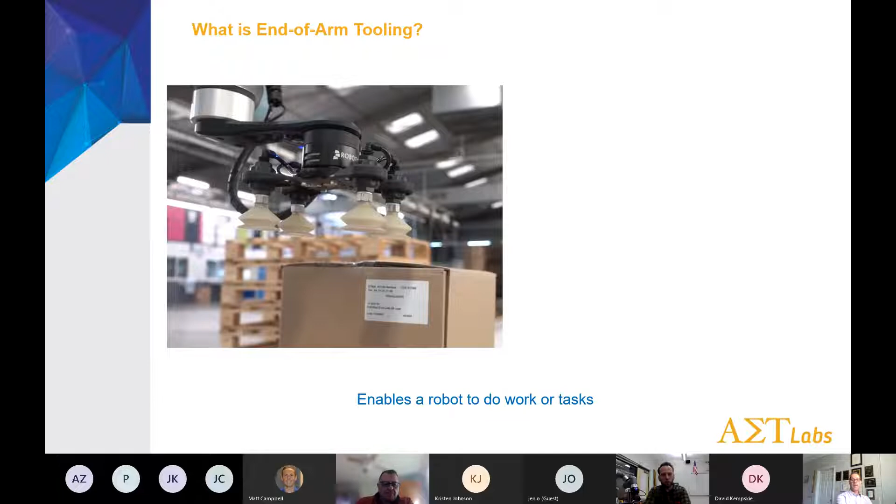But what is end of arm tooling? It's what enables a robot to do work or tasks. In this case, we're going to pick up this box and move it, using vacuum pads to make contact with the box. It could also have some kind of end of arm tooling that does a task - this is kind of a crazy multi-tool end of arm effector.

So it can really be anything, any kind of creative design. With Universal Robots, I look at this one with these multi-tools on it - this is what collaborative robots have enabled, for people to become more creative and think of these wacky ideas of what to do with the robots. You would never see anything like this on an industrial robot, just because of their nature - they need to be behind cages, and they're not as able to switch between applications as easily.

So, end of arm tooling - what makes it up? They're all different, but in general you're going to have some kind of transition plate between the end of arm tooling and the robot itself. It's got to fit the design right at that wrist, so it's going to generally be something strong - could be made out of aluminum, could be 3D printed as well.

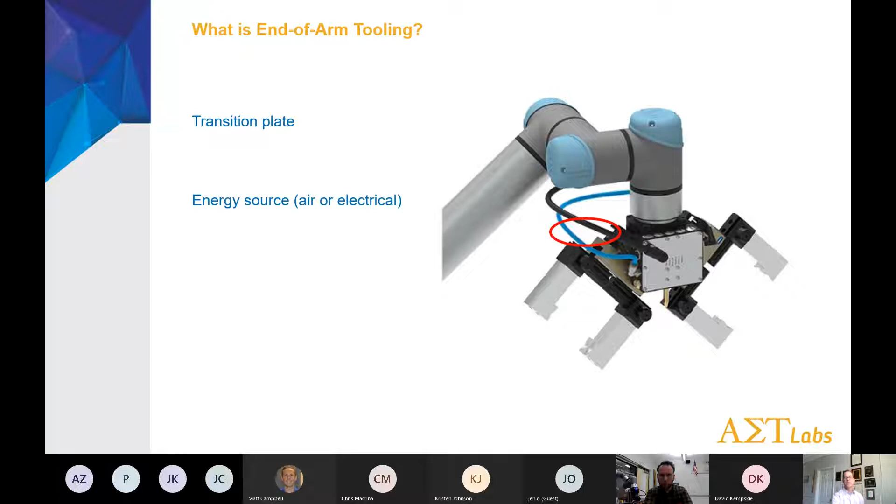You're going to have some kind of energy source, either electrical or air. Sometimes this is channeled through the arm of the robot, sometimes there's a valve right within the robot too, which is nice for keeping things clean. There's a sensor - something that needs to detect if it's picking something up, and it needs to know when to tell the robot to move.

And of course, the tooling - and this could be, again, anything. Most commonly you're going to see grippers and vacuum pads, but as you start to research it a bit more, there's no end to the types of tooling that can be out there.

Some considerations when designing end of arm tooling or coming up with an application: the application itself, of course, and what's the cost, what's the development time. These can certainly need to be a lot more - there needs to be something that, if it's placing the item into a fixture or something, may need to hold it, so you need to design that. There's a lot that can go into it.

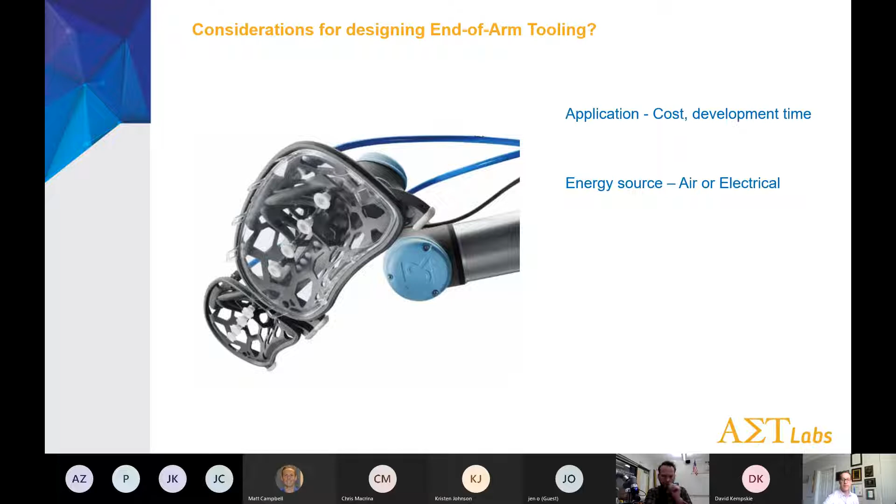The energy source - do you have the air supply? If it's not convenient, you need to provide some kind of electrical source, which is great for what we're talking about today, because Robotiq has these really nice end effectors that do not require an air source, but they are more expensive for sure. And the sensor, again, go/no-go, whatever it might be.

Safety - what are you going to have on the end of this robot flinging around? Is it going to be something sharp? Even with collaborative robots, they will stop when they sense something with the force sensors, but if there's something sharp on there, that could still hurt you. So it makes a difference - keep that in mind.

Weight, and this is a big one. With weight, you're really going to either increase the cost because you need a larger robot to pick up that end effector, so you want to look at ways to reduce the weight. One way is 3D printing, which has become a standard for a lot of manufacturing engineers - mainly because you can design them faster, make those fixtures lighter so you don't need as large a robot, and everything costs less since you're not machining them.

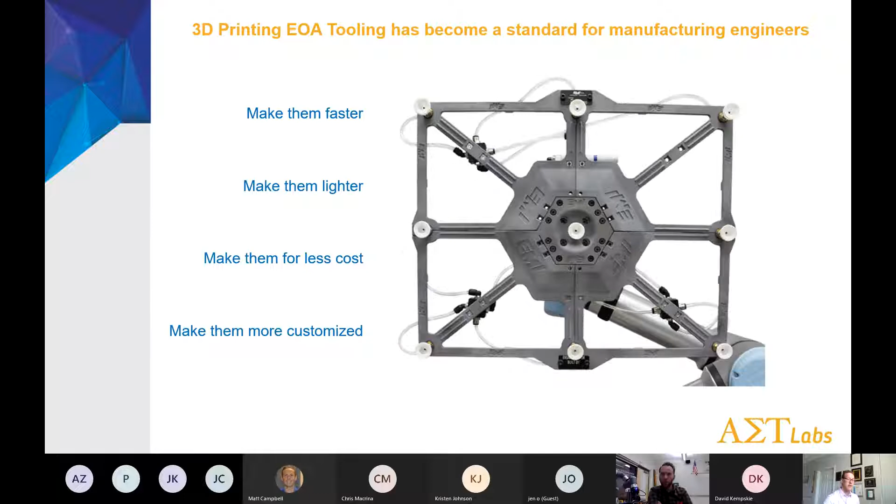The costs involved are much lower, and you can do a lot more in terms of customization. You can funnel channels through the tool itself to allow for air. In this case, they're using tubes, but you could do that in some cases. So there's a lot of things you can do with it when it's 3D printing. If you're doing anything with 3D printing and you're going to meld both robotics and 3D printing, it's a great combination.

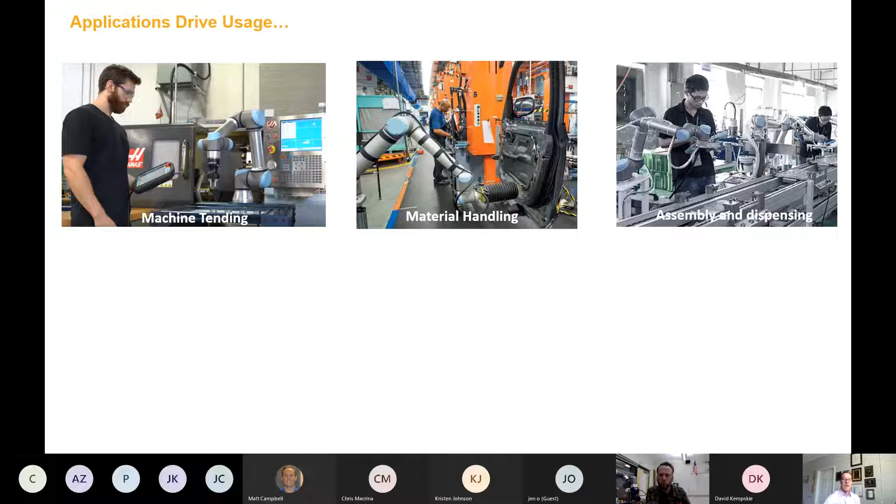We can't talk about end-of-arm tooling without talking about applications. Applications drive usage of the robots. Here are some standard industrial applications: machine tending, basic material handling—they're moving a door in this case—assembly and dispensing, welding, packaging, palletizing, metrology, and inspection. They all have their own specific uses and specific end-of-arm tools for that.

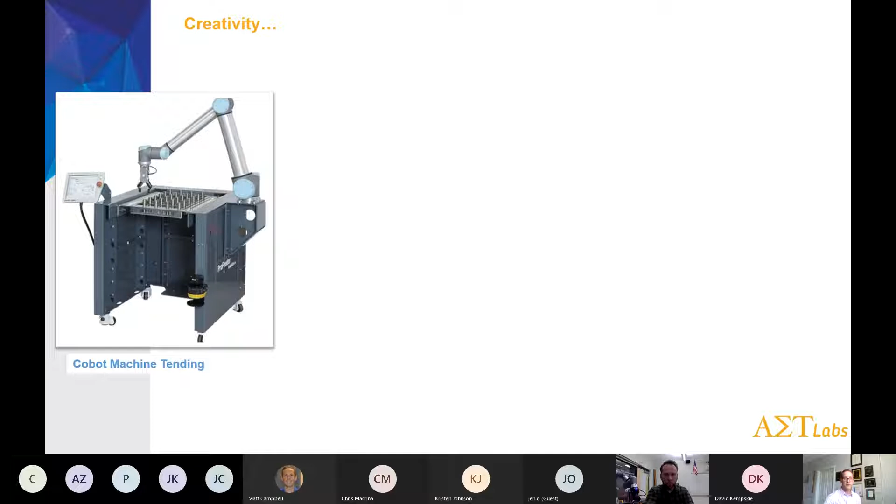With applications driving usage, especially with cobots, they drive creativity as well. We've seen that through a number of different companies that work with Universal Robots, and just the way people use the robots, because they are not bound by a cage and can collaborate right next to another person. The designs are so much more creative.

What we're looking at here are solutions that can be used in an educational space or in an industrial space. The one on the left is what we would integrate for a machine tending application. This will roll right up to a Haas mini mill, and with a little bit of integration work, we have a kit that we would use to integrate that in.

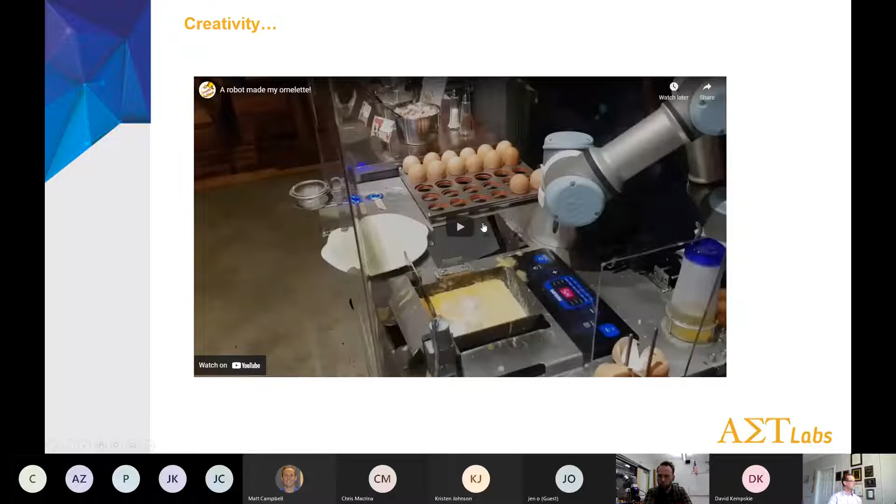Further creativity: food prep, bartending. These are all applications that have happened out there, and they all require unique end-of-arm tooling. This is just one of my favorites, so we'll watch this video real quick.

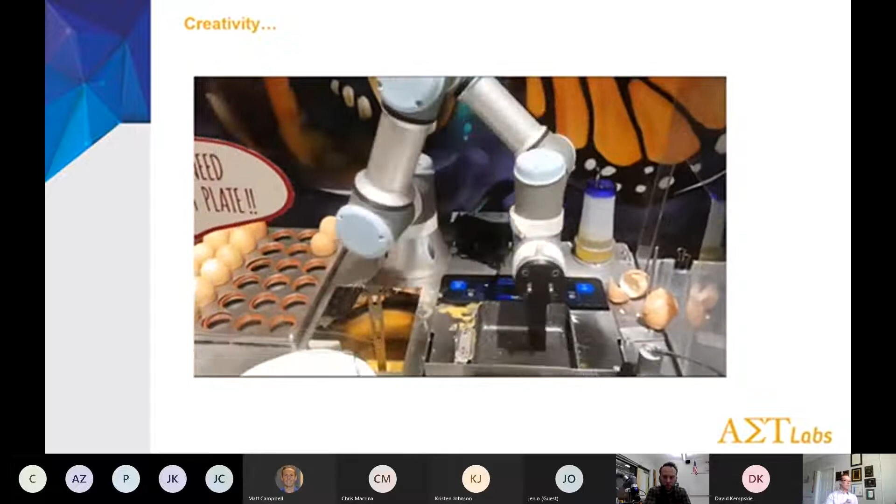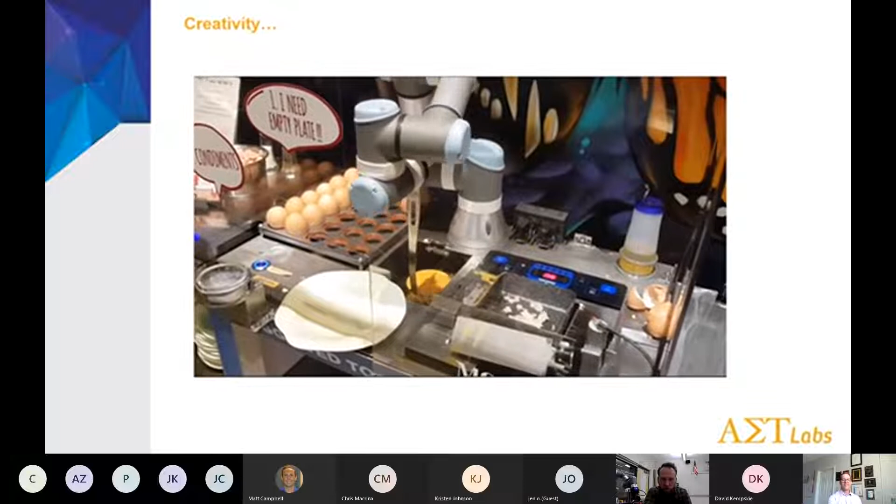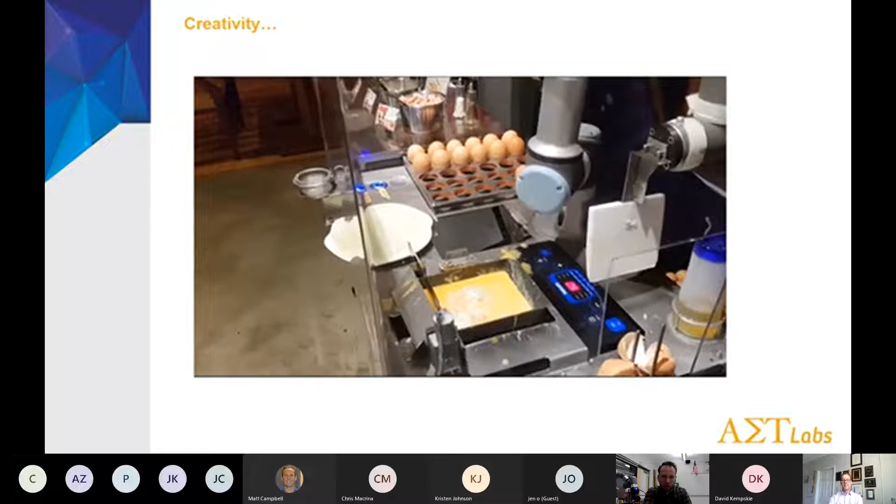That gripper is very small, huh? The fingers on it. It's just meant to latch. Yeah, I'm noticing things I haven't noticed in this video before, like what it just did there, where the fingers just opened up to hold it.

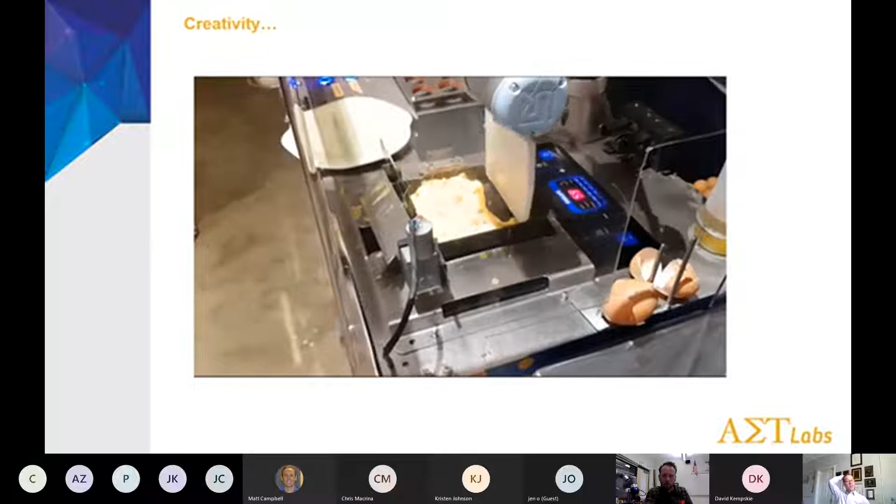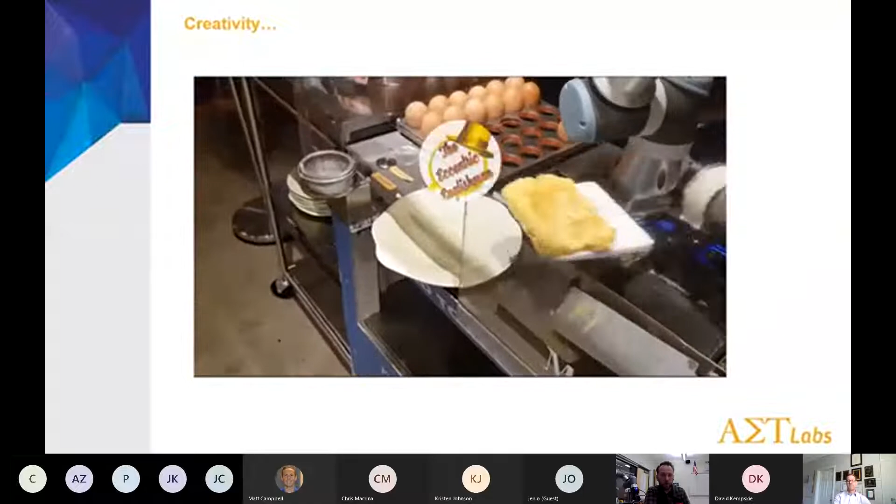So it's like what they would consider an auto tool changer, and highly customized. Yeah, and a multi-purpose gripper too. And there is, on the UR Plus site, a gripper that does that, and maybe even Robotiq has something like that. Well, actually, Dave, you got me thinking that the gripper we're showing today—there's nothing that says you couldn't just take the fingers off this gripper and switch them out and even customize them if you wanted to. For sure, yeah, for sure. I just think that omelet's maybe a little undercooked, but nonetheless, really cool how that's done.

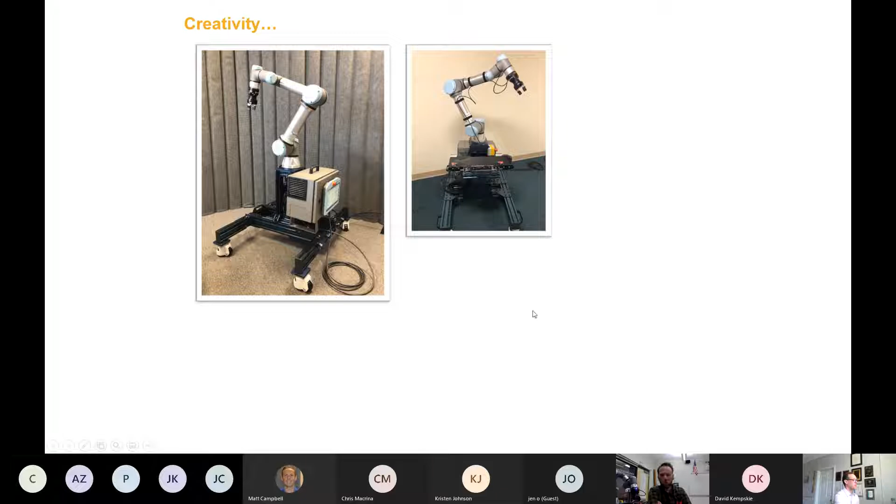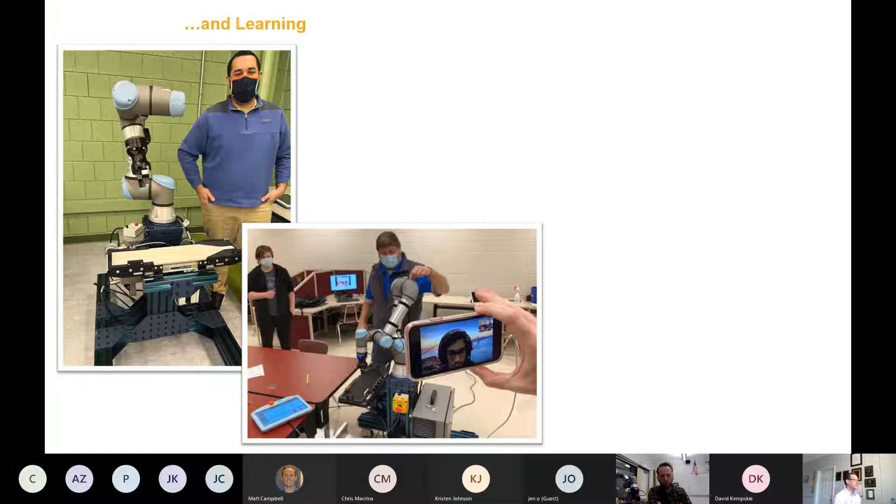What's really nice about these cobots is you can just roll these things right up to a table and work right next to something else. Again, no cages needed, and we can be really creative in how we go about designing these things, and really it comes down to learning, so that the usage applications drive the creativity and learning. It's exciting stuff when students realize what they can do with these, and I'm just so excited to see what Essex Tech does as they get an opportunity to really start using their robots even more.

A couple final last things about the robots, and for a lot of us here on this call, this is kind of where you guys are the center of the universe when it comes to the robots and implementing them in your program. These are some of the things I'd see you doing with the robot in your program. You might be determining a return on investment for a project, designing end of arm tooling, jigs and fixtures for special projects, material handling.

With collaborative robots, the thing you're not going to have like with industrial robots is the frequency of deployment. When you make an investment in a universal robot, you don't have to dedicate that robot to one specific task. The cost of putting an industrial robot in with guarding and everything else means it's really going to stay with the same application it was designed for originally. With universal robots and collaborative robots in general, you don't have to do that because you can easily redeploy it. That's a big part, I think, of what I see here.

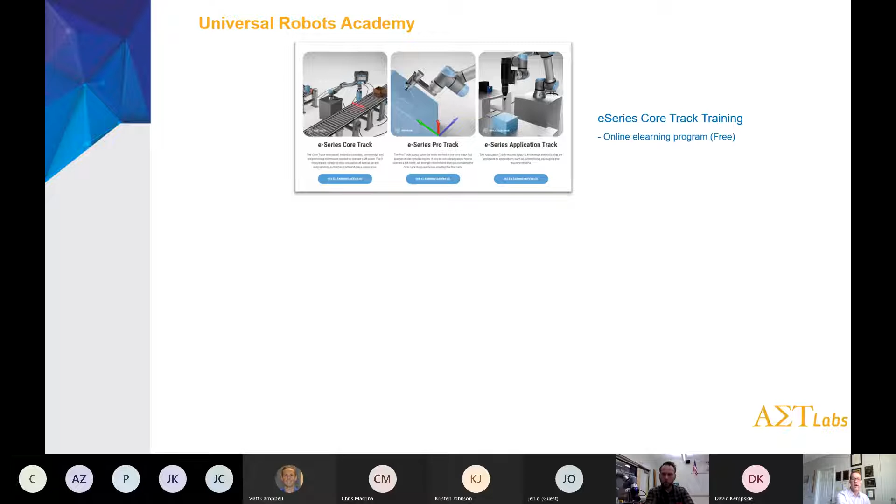Or, to take your program to the next level, there's the skills certification program with Universal Robot. It's a hardware package, kind of like some of the ones you saw in those previous pictures. It's a certified instructor training program with a curriculum that's 10 units, 32 hours. It is accredited as well, and we can certainly provide you more information on that. But that's my overview.

I'm going to hand it back to Adam, unless anyone else has any questions.

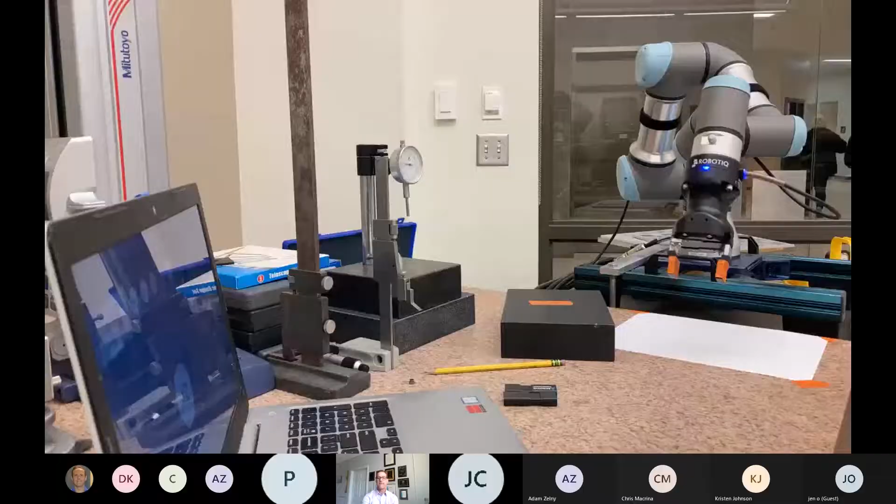All right, so I am going to switch over my video to my phone. Okay, and if anyone can't see my screen right now, or you don't have the robot on your screen, you can let us know. It should be up there for you.

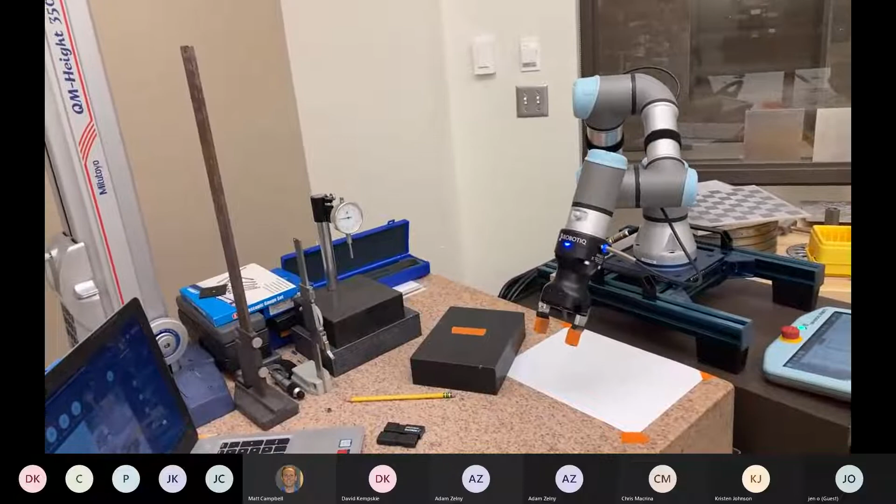As Dave mentioned, yeah, we are at Essex North Shore Technical - what's the full name of the school? Essex North Shore Technical and Agricultural High School, I think, is the full term. And it's a really, really neat school, I love visiting this place. But right now I am in the metrology lab, and students were coming in and out using this profile projector earlier. It was pretty cool, but a nice little spot.

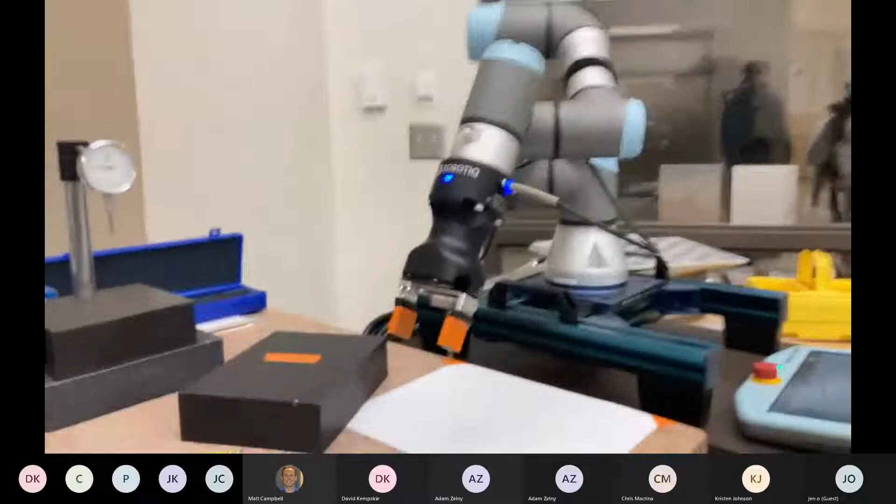All right, let's jump into the demo here. So I'm going to show you a program right off the bat, and I do want you to see - hold on, let me just do a quick adjustment here. I do want you to quickly see what the interface looks like on what's called the Teach pendant, and the software is called Polyscope. This is Universal Robots' proprietary programming software, and it's a really elegant user interface that I've really enjoyed using. So we're going to take a look at this program tree in a little more detail after we run the program.

Okay, so first thing we're going to do, I'm going to go ahead and start the program and just give you a little bit of an overview. And again, please, by all means, jump in if you have any specific questions.

So what we're looking at now is the wrist camera flashing its light and looking for an object. In this case, it did not find an object, so it's going to see if it can find one to bring back over for itself, but it did not. So it just stopped the program.

Now, if I throw down a USB stick and run the program again, this time it finds the object, picks it up, places it down, and comes back to look for another one. Didn't find one, so it goes back over to look for one, and this time it does find one.

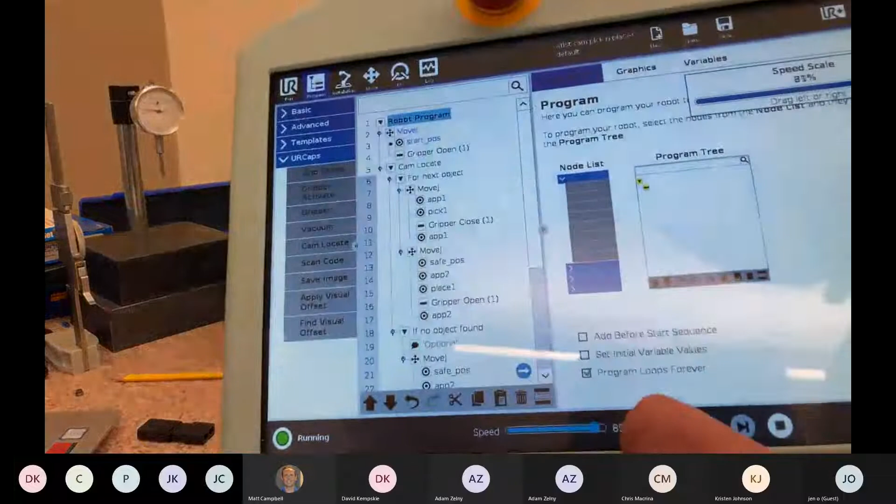I'm going to slow this down a little bit. And what's neat about this is I'm just on the fly slowing down the program speed with a slider right down here. So notice I deliberately angled the gripper when it drops because I wanted it to drop the USB stick in a random fashion, to showcase how the wrist camera is detecting the object within its field of vision.

And in this case, if we have a couple of objects, it will find both of them as denoted in my program. In this case, I said only to look for no more than 2 objects. And because it's going to pick up the other one, I'm going to want to remove this because it would just try to stack it on top.

And at this point, if I were in a classroom of students of any level, my next question would be, how would I alter this program to make it more efficient?

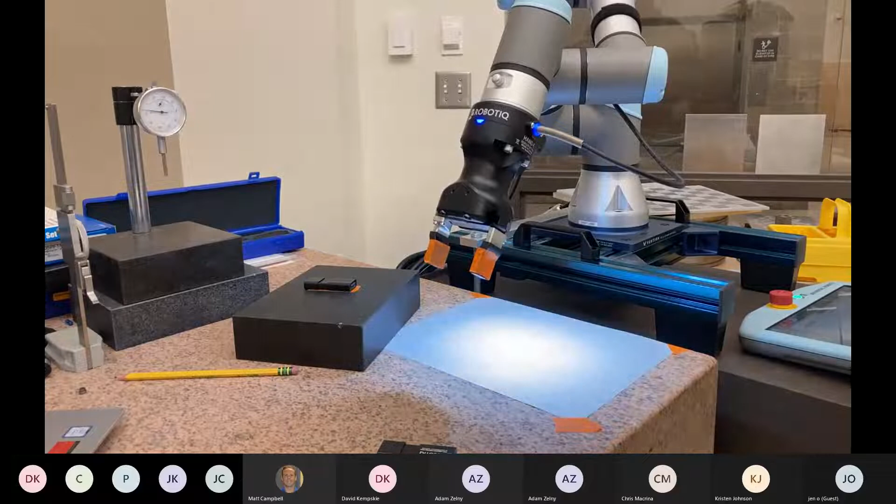All right, so this is a pretty standard loop here, nothing too flashy about the programming, but what I am going to do is change the dimension of the object that we're picking up.

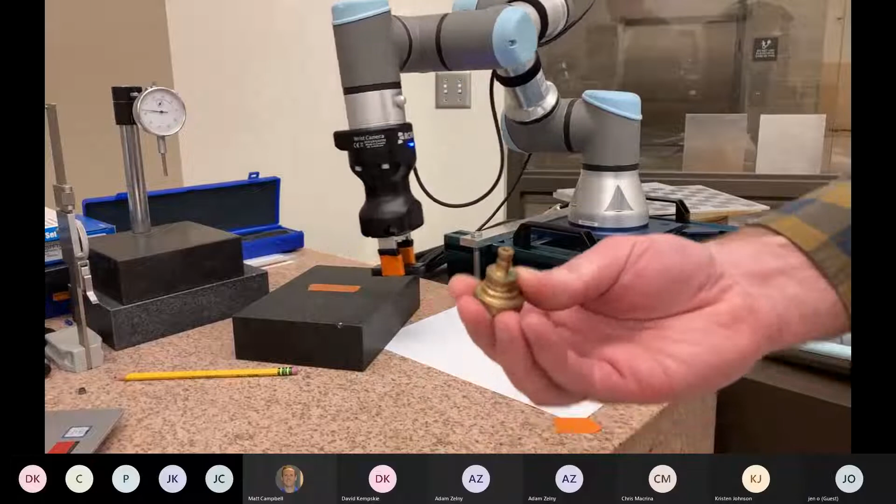I have a few, sorry, I'm just stepping away for a second here. Okay, so I'm going to try to swap out the object when it doesn't find an object. I'm going to try swapping it out for this little brass machine piece here, which has a different dimension than the USB, by probably 2 or 3 millimeters. So I'll let it run through its course here.

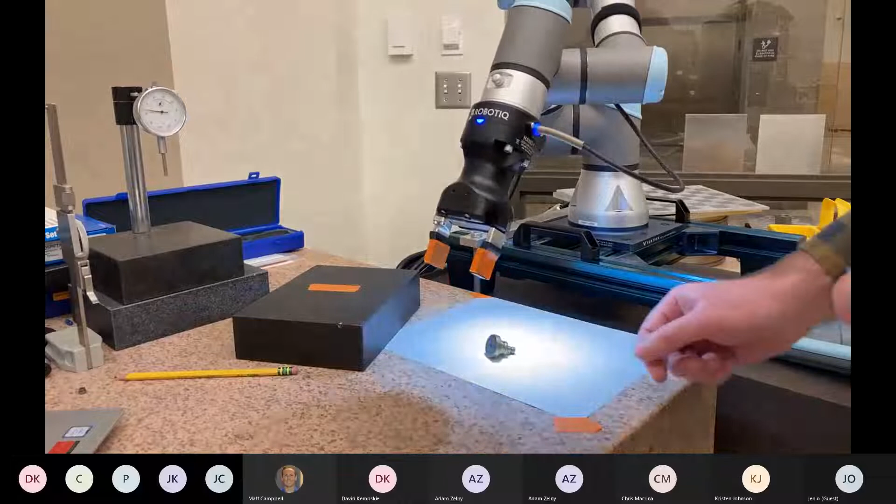And we'll see what happens when it tries to go pick this guy up. All right, so in this case, it did find an object there. It's going to go back to stopping.

So notice there, it found the object because the thickness was too close between the USB and the little brass component. But when it dropped it down and looked for it, it did not pick it up, right? So it definitely did a great job of distinguishing that this is not the USB stick shape.

But this time, let's try running the program again. And instead of the USB stick, I'm going to swap it out for a pencil.

Okay, so in this case, I programmed it to say, is it within a certain dimensional range? And if not, then open the gripper back up and let's stop the program because something's messed up here.

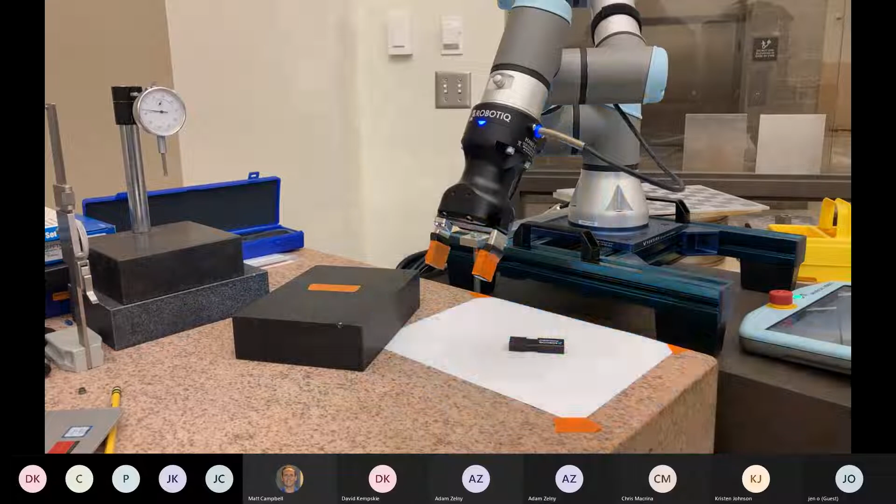Now, this is a great sample that we're looking at here. But when you're working in the classroom environment, in the lab environment, and let's say you're onboarding people to the robotics, the UR robot system and the Robotiq grippers and wrist cameras, how do you bring this to the next stage? Like, what is this for? And I think, what would be the application for this process?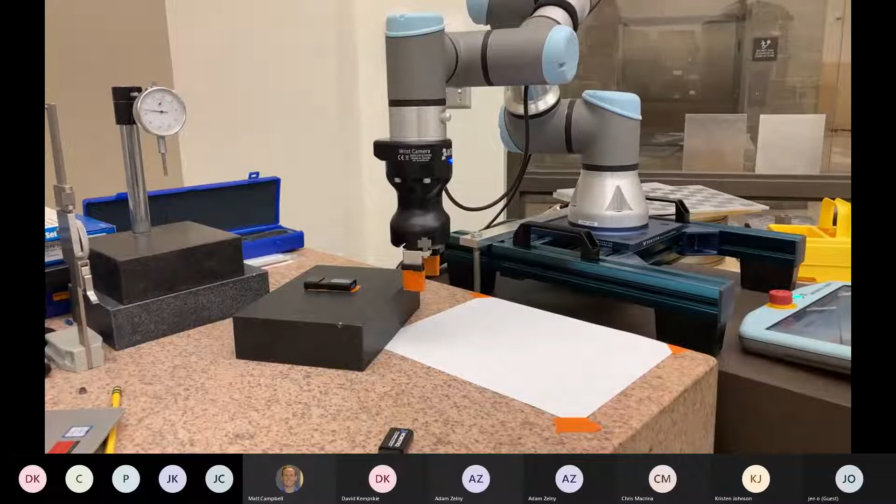And since Universal Robots is marketed exclusively as a collaborative robot where people are interacting with it on a regular basis, I'm going to stop the program. And I'm even going to come back just a little bit to see if we can adjust this. So really meant to come in and on the fly change waypoints, move the robot around, make small adjustments. But what's the end goal here?

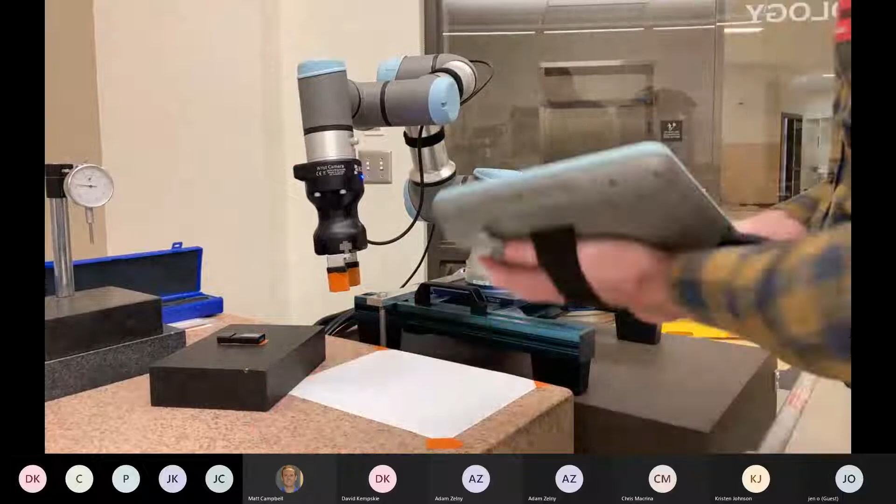In this case, if it was a collaborative robot and the point is I'm inspecting something, or I'm doing human inspection of this USB stick, and I am not really too concerned with manually palletizing these, maybe even on a plate, I can just more casually look at it and say, good, next, good, next, and have the vision system detect what I'm placing down. So I can kind of just quickly toss it over here. And that's just a small example.

All right, let's go take a look at the program tree.

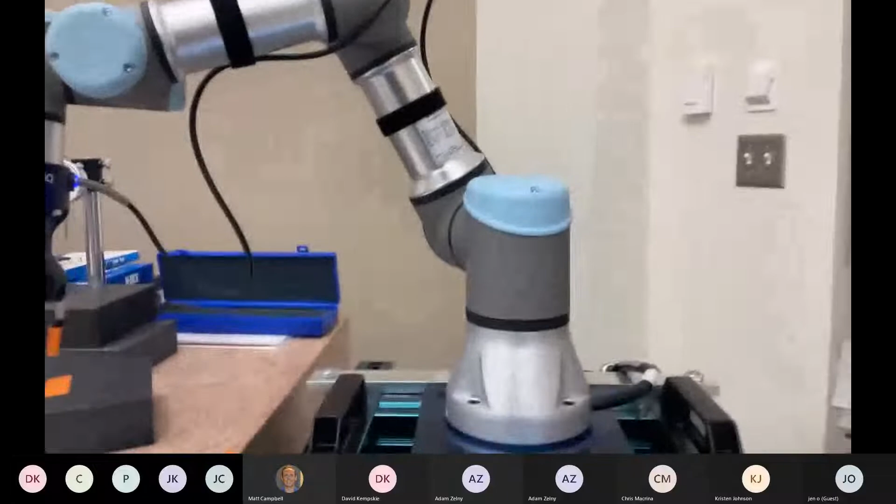Whether or not you're familiar with computer programming, Polyscope uses Python for its programming language, and it has a specific kind of buffer that changes the raw Python language to what you're seeing here. But you can write custom script in Python.

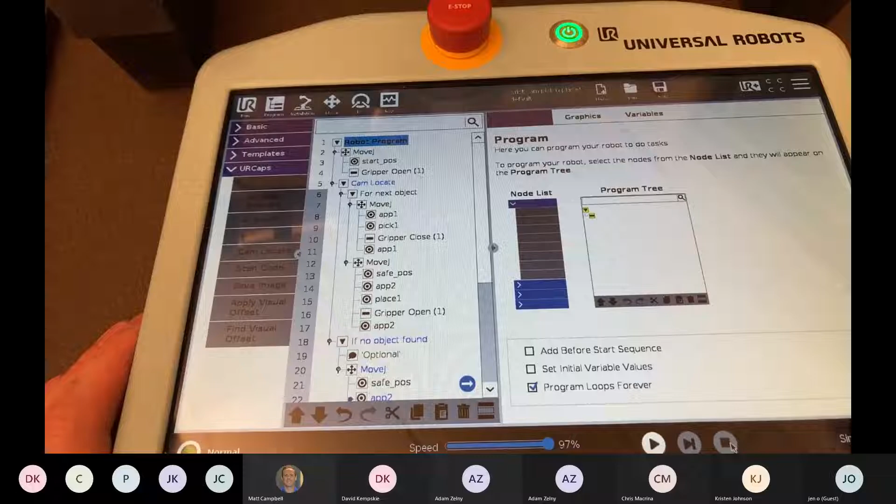Something Dave and I were talking about is our UR plus end effectors, or end of arm tooling, like this Robotiq gripper and wrist camera. They essentially come pre-packed with what's called a UR cap, which is kind of like an app that runs in Polyscope, and it comes pre-packed with all the custom script needed to run and operate the peripheral.

Let's take a closer look at what that looks like. In our program tree, some basics: we have a move command, which says let's do a start position and make sure the gripper's open. Then we have this really fantastic cam locate node, which is exclusive to the Robotiq wrist camera. I'd like to show you what programming this looks like.

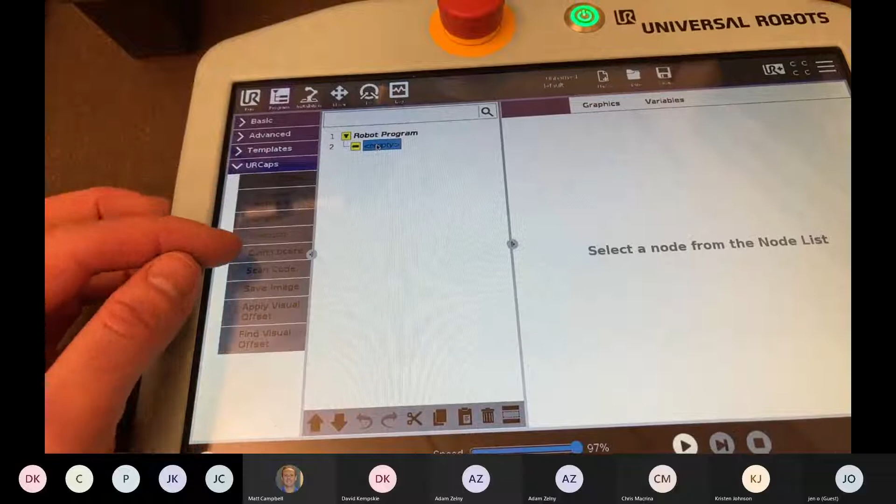So we'll go to a new program, and we are going to go into our UR caps section here. Click on cam locate, and right away it populates this. It just looks like a few items here, but beneath this is tons and tons of custom script written by Robotiq for UR.

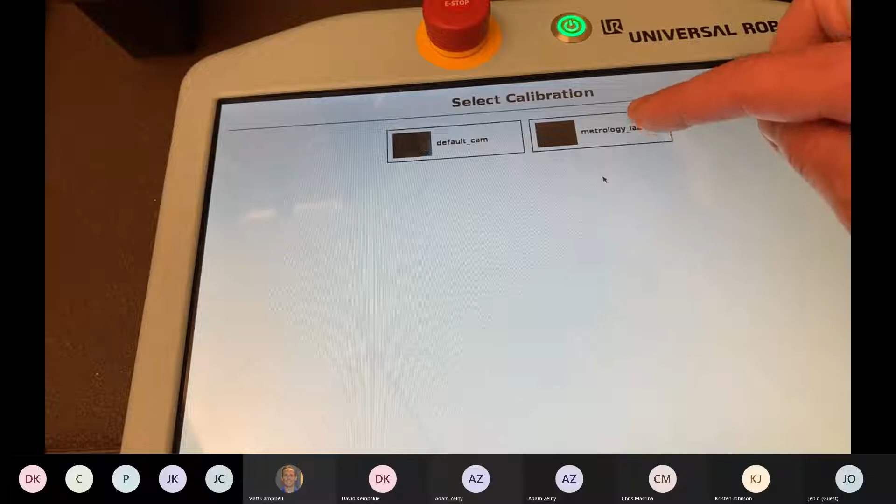So we'll click on teach object, and we're going to pick a calibration. In this case, earlier I made a calibration point for where we are now, the metrology lab. We'll see what happens when I click and hold.

Our go to snapshot position, that's what this is here. That's just going to move the robot arm to a position where the camera, where I set it, sees a good area of my picking point right over here.

The next thing I'm going to do is place an object down. In this case, I'm using the USB stick again. I chose this very specifically, a white piece of paper and a black USB stick, because with vision systems, that's a whole other area of technology you need to consider. We have this low reflection matte white paper, and a fairly low reflectivity USB stick, so they're both great candidates for the wrist camera to see the object.

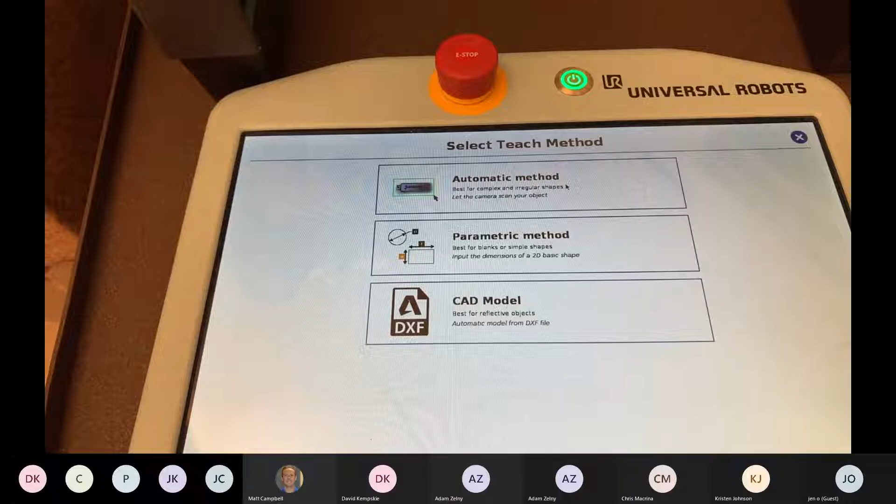Now the light comes on the wrist camera to look for our object, and we see a nice little display of the camera here. We have some reflection here, hopefully you can see this okay. Right away we see this green box around our object, which means it's done a good job of auto detecting it.

If I wanted to, I could go into some more advanced features of the camera, and this is stuff that you would see if you actually dug into a camera app on your smartphone, or were using a digital camera, exposure, focus, white balance, changing how bright your LED is, and so on. That would allow you to work in different lighting conditions.

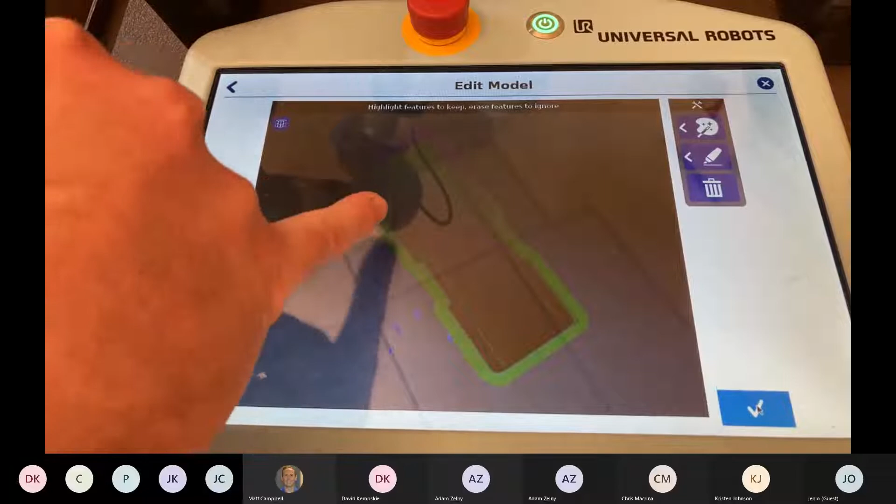So we'll say this is okay because it did find it. Here we have a close-up of what it exactly found, and it even shows us these little blue specks here. That actually is the data or the pixels that are essentially required to look for the object.

However, there's a bunch of stuff on the inside here that we don't need, we actually don't want to look for this. We just want to look for the outline of the object. So it makes it really easy for us to click on some tools and erase the blue sections, or the blue pixels, that we don't want to look for.

Can you just pick that up and kind of tilt it towards you just a little bit? I'm seeing a lot of reflection on the ceiling, I think. Sure, just want to make sure. Yeah, I don't know.

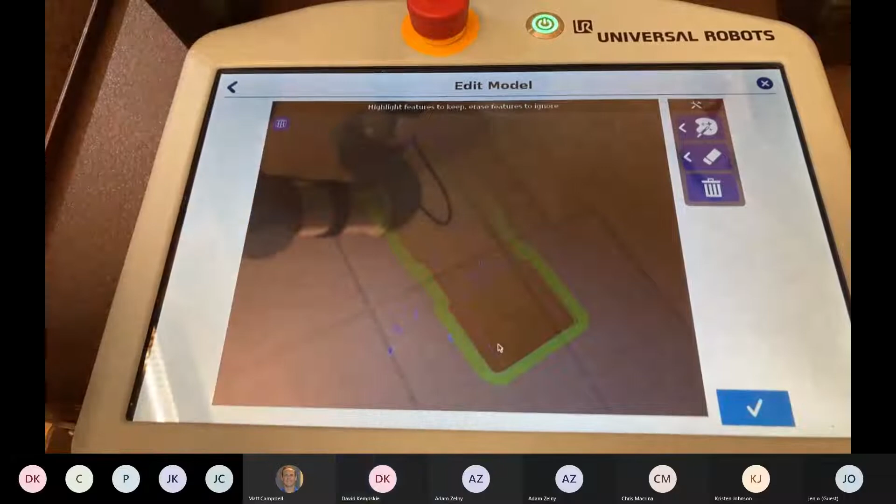I don't know if it's going to be better, honestly. Yeah, I know, it's tough. I wasn't sure. Okay, yeah, that's actually... I was trying to see what it was. Yeah, that's better right there. At least it gives people an idea to see it.

So I'm just basically erasing all this midsection here because I don't want it to look for this. If I flipped over the USB stick, it wouldn't have that on the other side, it would just be looking for the edge. All right, so once we're good there...

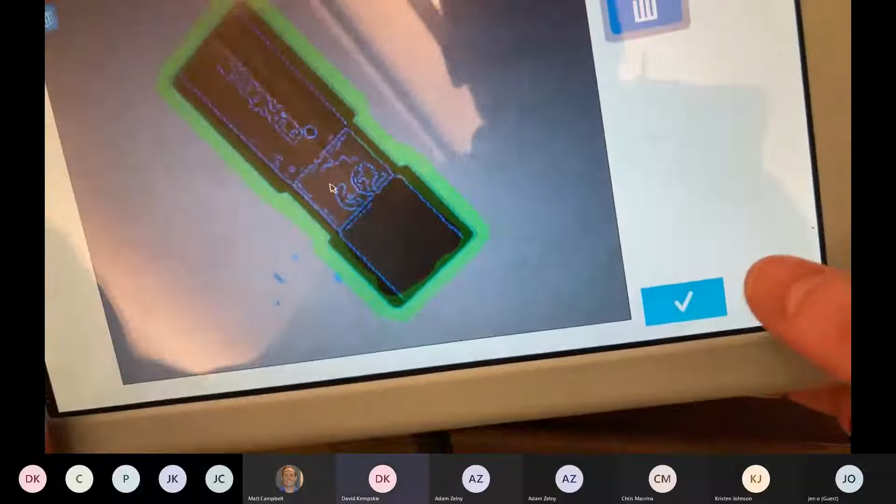There's a question from Patrick. I think he mentioned, can it find the printing? I'm not sure if he meant the print that was on that stick, and I guess the answer is yes, I guess it can. It would be, since this is also black in here. I think it would probably be better if this was like a white lettering or even a white block. It would be much better. It's looking for contrast, right?

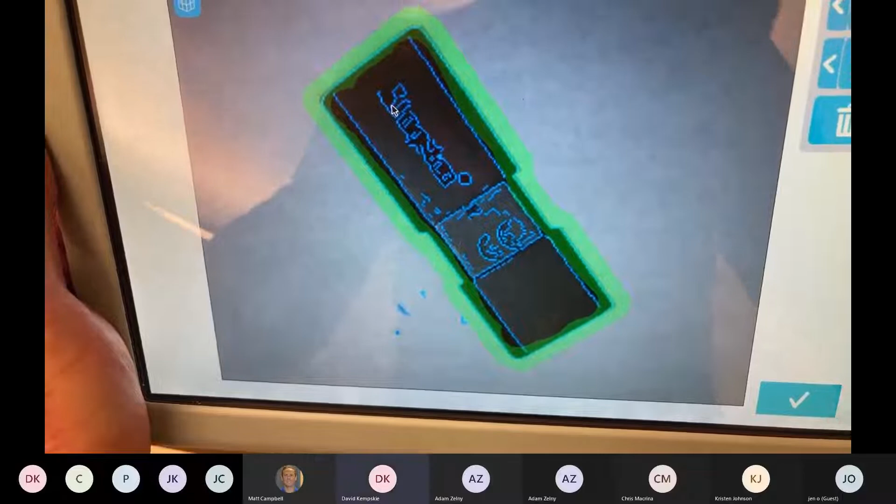That's the most important thing here, is we need contrast. But do you think it's possible that it could, if it was flipped over two different ways, if it had no writing or printing on one side and had printing on the other, that would be some differentiation between the two. And so let's say it wanted to flip it over a certain way every time. Sure, it would know how to do that. It's a variable, and it could be an unstable variable based on reflection, right?

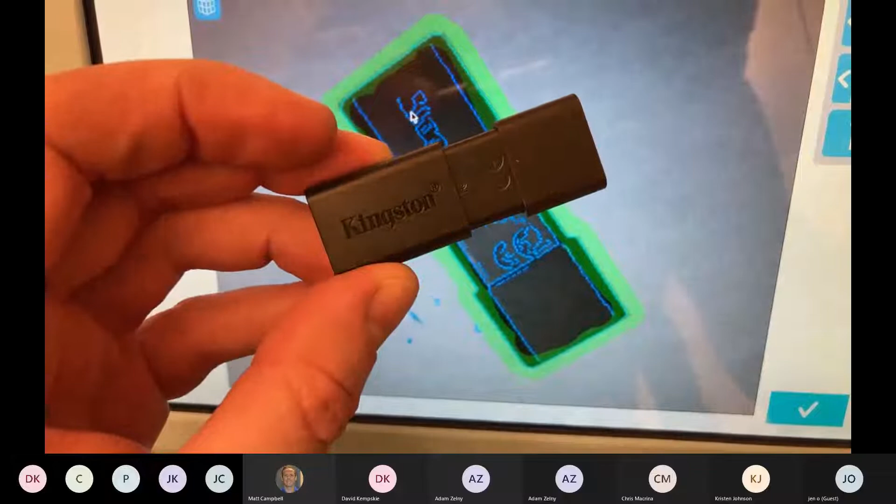So you could imagine, if your USB stick—I'm grabbing the other one here—if this USB stick, you can even see right now when I tilt this, the reflection of the light changing dramatically. And yeah, the camera, you would need to kind of create some specific conditions for that.

But more to Patrick's question, I guess, is you could put labels, or you could actually have an object with a specific type of printout that was almost designed to work with the camera. And even more so, imagine getting into the territory of QR codes and barcodes. So the wrist camera, the Robotiq wrist camera, can absolutely read QR codes, and that's huge. That's like, you can go down a rabbit hole with that. But yeah, that's a great question.

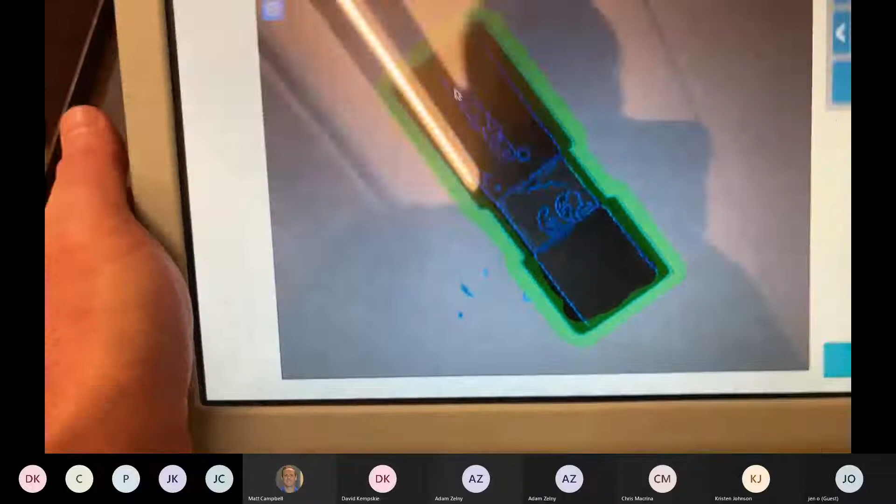Okay, so we're going to click our selection, confirm our selection here. Let's see if I can change this a little bit. I might just end up holding the polyscope.

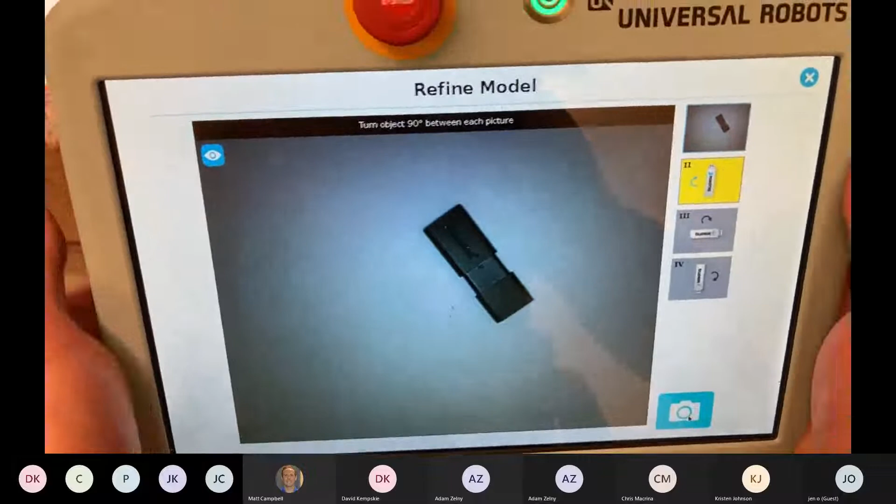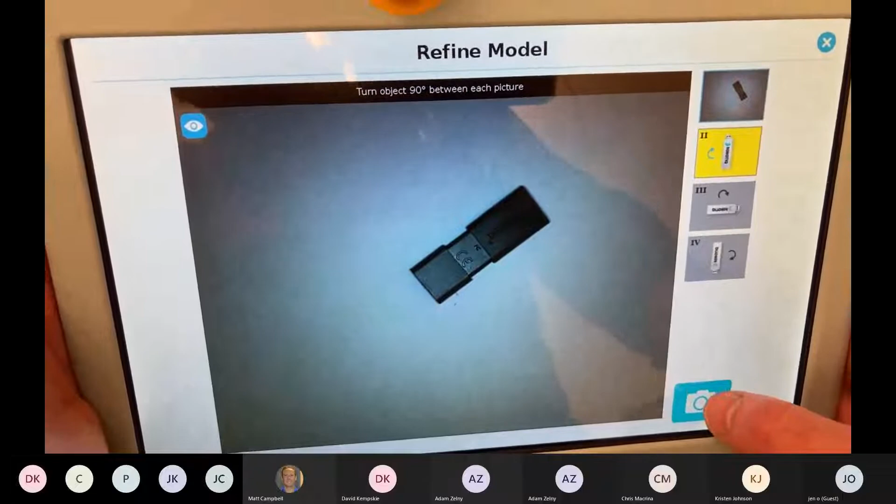Okay, and now it's asking me, for the automatic method, to do 4 different orientations, and at each orientation we take a photo. I think this part can take a little bit of time. Let's see, hold on. There we go.

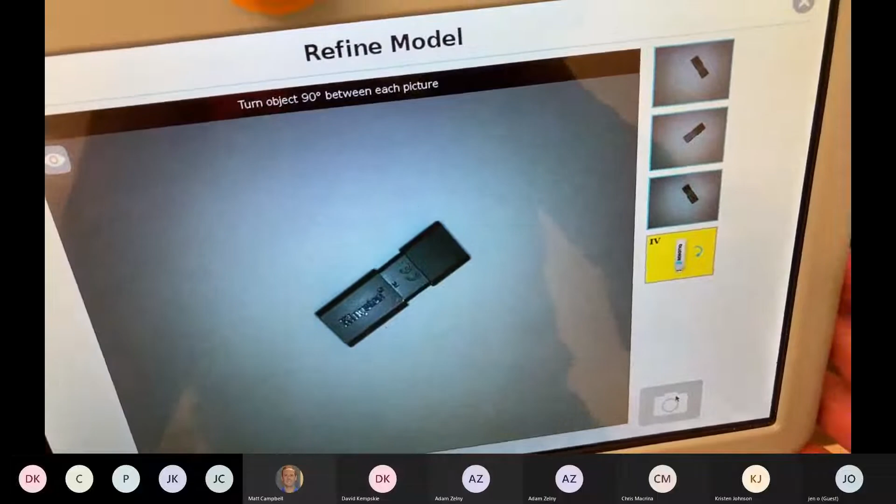So 4 orientation photos, and then it gives us a more detailed outline of what the camera's seeing. What it's showing us here is green is valid detection pixels, and red is maybe not so good. But this actually doesn't look too bad, so we will click the check mark.

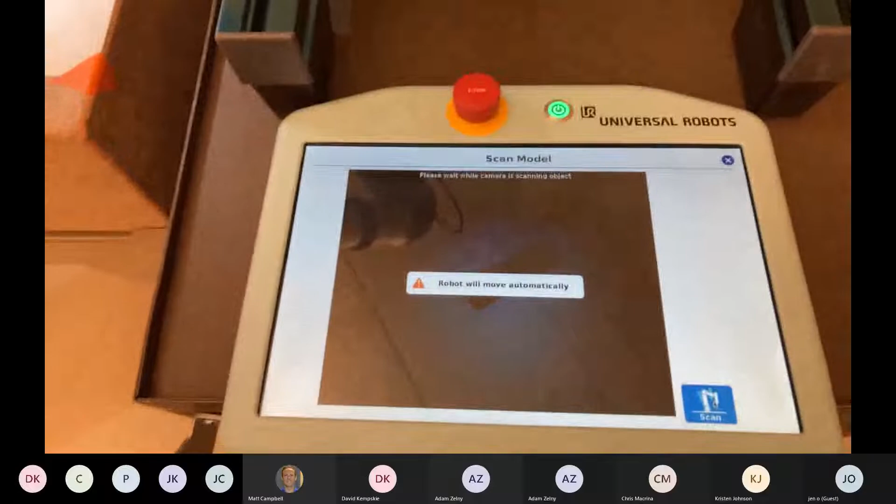And now it says the robot will move automatically. What it's going to do in automatic method, which is kind of neat, is it will move to different angle views of the part to get a better understanding of the dimensions of the piece. If we did the parametric method, we would avoid this part. The parametric method could potentially be a little bit faster, like if we had exact dimensions of this.

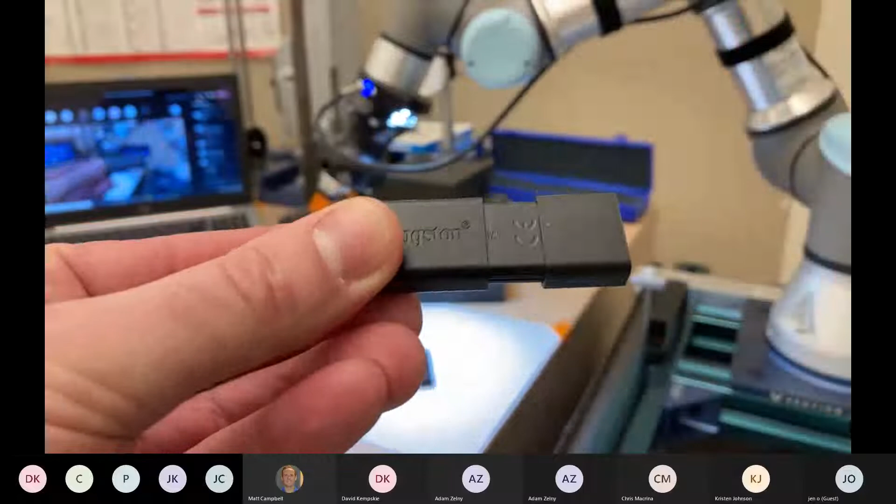Another interesting aspect to this method with this USB stick is it has this little section, when it's open, that's a different dimension in here. And if you noticed, our outline rendered by the camera did detect this. So when you see our program running, if the orientation is this way, the gripper might come in—let me see if I could do this just by hand—the gripper might come in like this and grab it, and move it away. But if the orientation is flipped like this, the gripper is going to turn, because that's how it was programmed, with that specific orientation.

On the other hand, if we're doing the parametric method and we're just saying this is a rectangular prism with no distinct features, it will always go for the most efficient path, no matter which orientation. It'll just kind of come in and turn just a little bit. So yeah, really cool, neat things to troubleshoot and problem solve when you're programming on this side of things.

So right now it's doing 9 positions. It's on 7 of 9, which we have on the screen here. Once it finishes, it will tell us if it gathered enough, like all the positions look good, and the edge finding is really its biggest thing here, because that's all we want it to find. It will tell us if it's valid, and we can move on to programming a pick and place. This is what I did earlier today when setting up the demo for you guys.

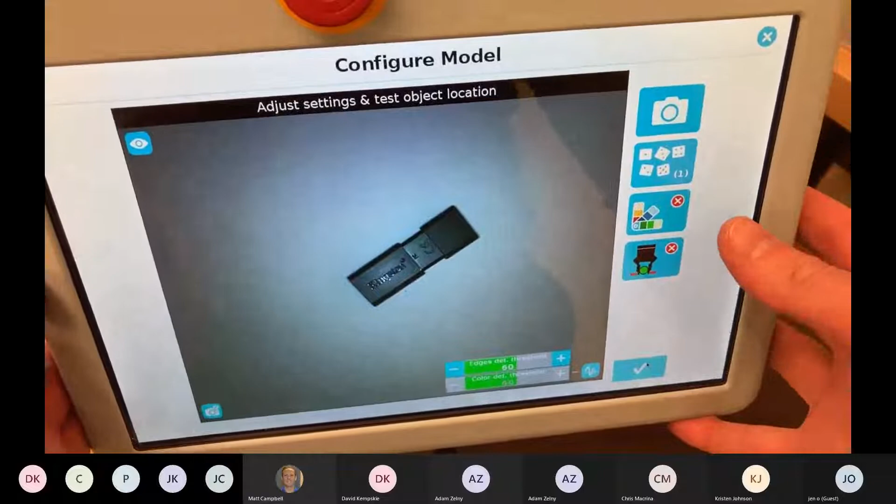All right, there's the last one. And our cam locate wizard is back here. I'll probably lift this up for you with some more features. I love how Robotiq and UR just have these really great wizards that start off nice and simple and then allow you to stay simple or to get really into the nuts and bolts of programming.

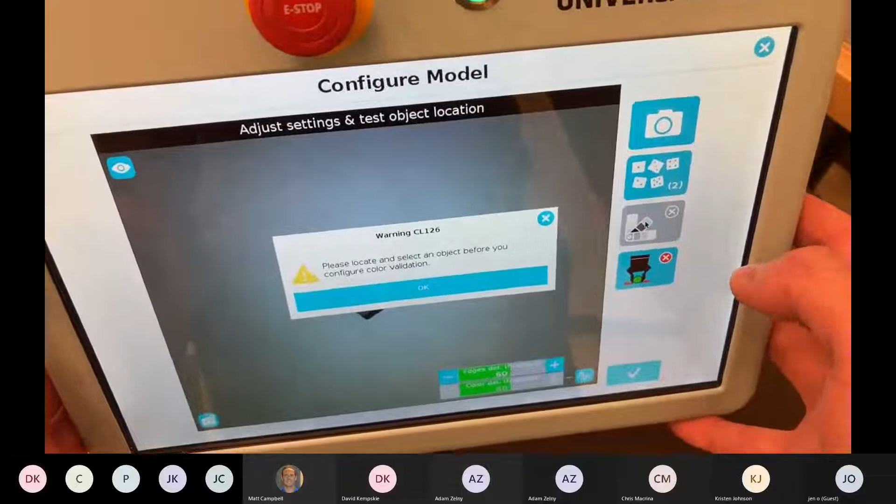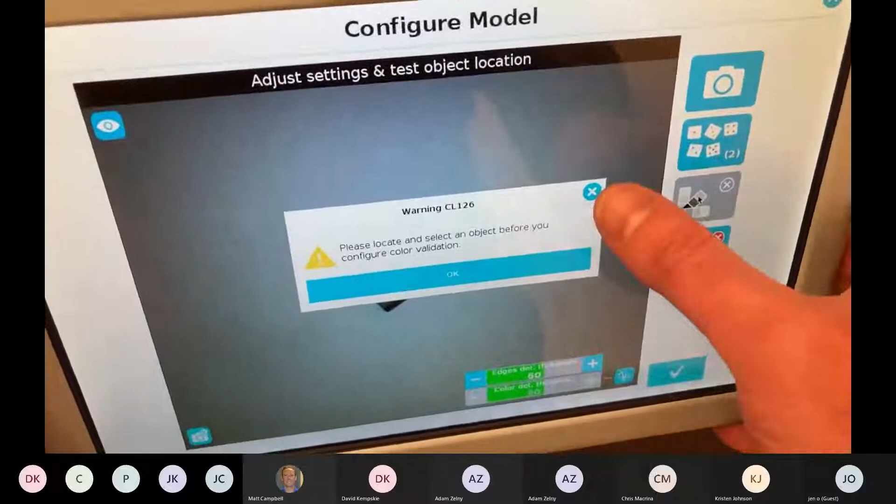So here is where I told the cam locate module to look for up to 2 objects. This is where I can actually do color validation, which is pretty straightforward and easy to do, but that runs another section of the wizard. So let's say if I had a red USB and a black USB, I can absolutely have 2 separate routines that say, if black USB is located, do this, and if red is located, do this.

And then you also have the option... oh, I know why it's not doing this, because it wants me to take a photo. So this is kind of our last validation photo, and it gives us an edge score of 99, which is really good, and there's the shape of our USB.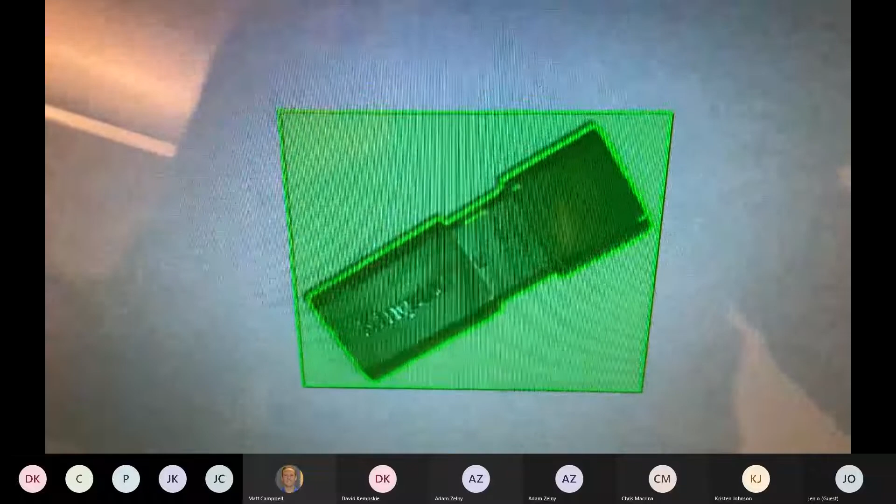And now I could go in and do color validation. I'm not going to do this one today. And this one would be, oh, I have to take a photo again.

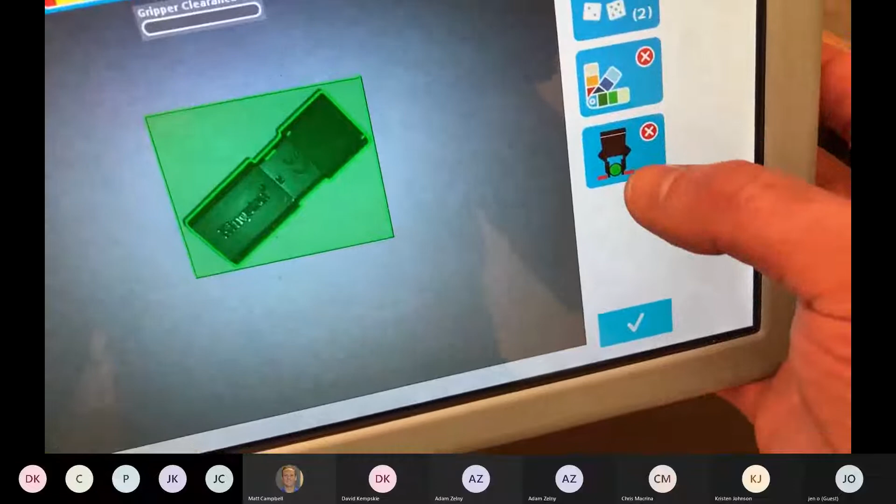And gripper validation—or it's not gripper validation, I guess it's the clearance area. So collision validation, that's what it is. Here we can say we can highlight an area, so highlight model area in green. Gotta turn it on.

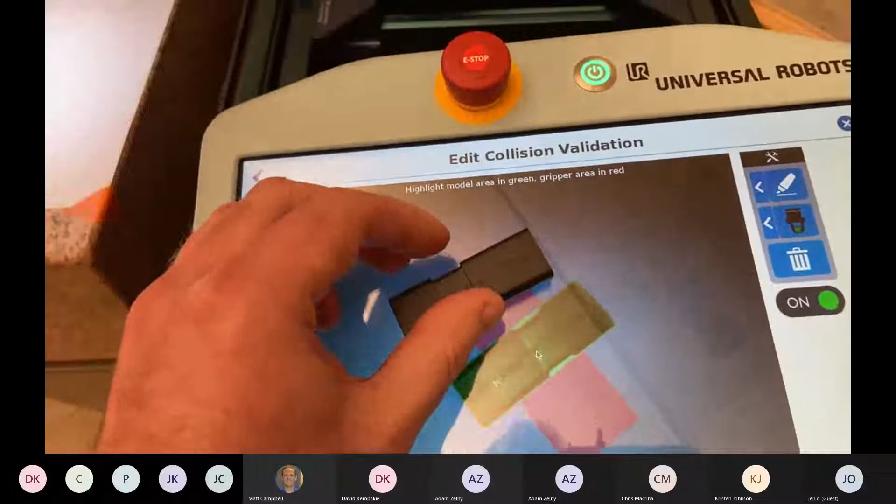So this automatically attributes where it's going to be gripping. What this would be about is if you had another USB in your field of vision that was touching or inside of this red area, that's our gripper area, it wouldn't come down and grip this object. So it's a pretty neat feature that we can play around with and actually customize.

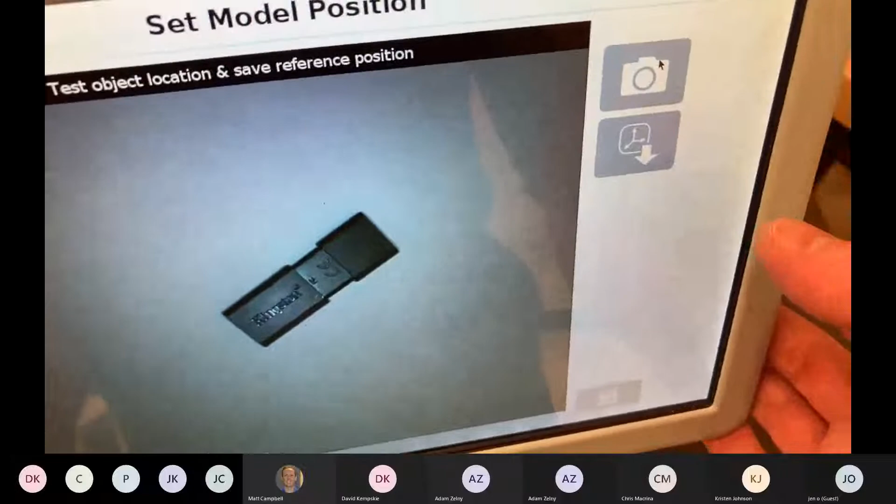Okay. Finally, we just take one final model position. It's kind of like our default model position. And it gives us a final readout, and we save that position.

And now we can go in and say, if object is found, what are we going to do? Just to jump ahead here, let's open up Wrist Cam pick and place. So that's where we say cam locate for next object, do these moves, and if no objects found, do these moves.

Any questions so far? I'm not looking at the chat. It doesn't look like there's any.

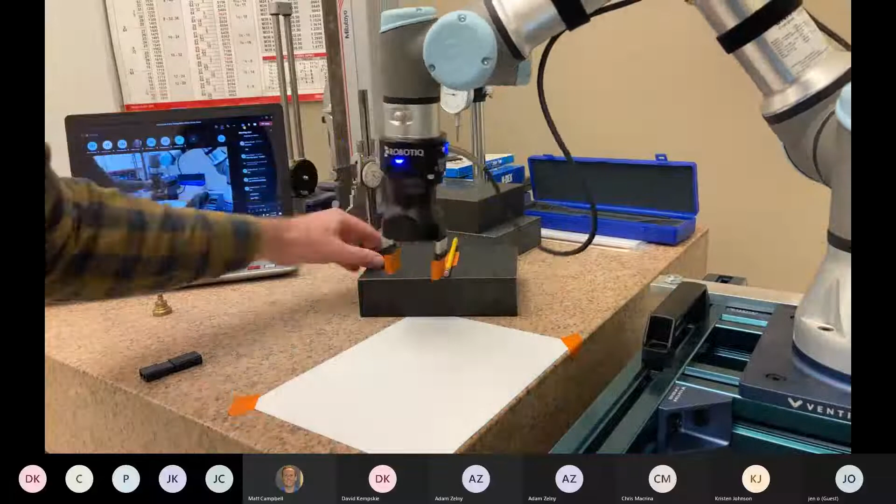Okay, so the other thing I wanted to show you was our gripper check, which was happening at this point right here, where it comes down, and if it finds something, picks it up. But again, you saw me put the pencil in, and when it goes to pick up the pencil, it's a no-go. All right, leaves it be. So let's take a look at that.

Okay, so what we have, this is in 'if object found,' we have it go do a series of moves up to the point of gripper close. At gripper close, we have a grip check, and in grip check, we have if object is detected or not detected. If we want, we can have an optional validate grip with dimension. So if I didn't have validate grip with dimension checked, then it would pick up anything that's there, anything bigger than the gripper fully closed. But here I said close to 58%, which would translate to a dimension in this case.

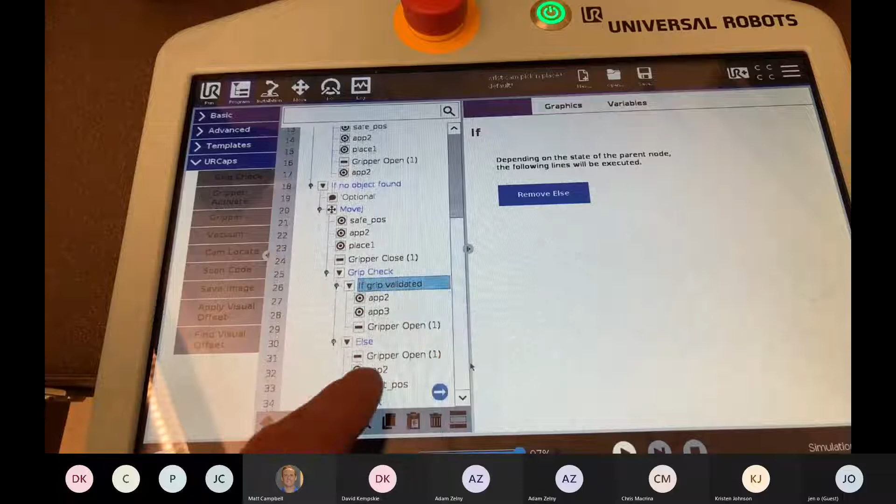And if grip validated, do these moves, or else gripper open, so it doesn't pick anything up, and then just go back to the start position and stop the program. So pretty neat feature, grip check. Very easy to do too—it's literally just putting your gripper action in there and putting grip check in.

And on the gripper topic, another neat feature we can take a look at is what our gripper actions look like. So you have three variables here: position, speed, and force. And for force, you can see I'm at 10% here.

So if we're picking up objects that are metal, we could certainly put force up to 100%. But if we're picking up something more delicate or fragile, we can bring our force down all the way to 1%. And obviously speed and position too. So if you were going to demonstrate by picking up an egg, we'd be really careful with our position to make sure it's just getting to the point of the outside of the egg and barely grasping onto it.

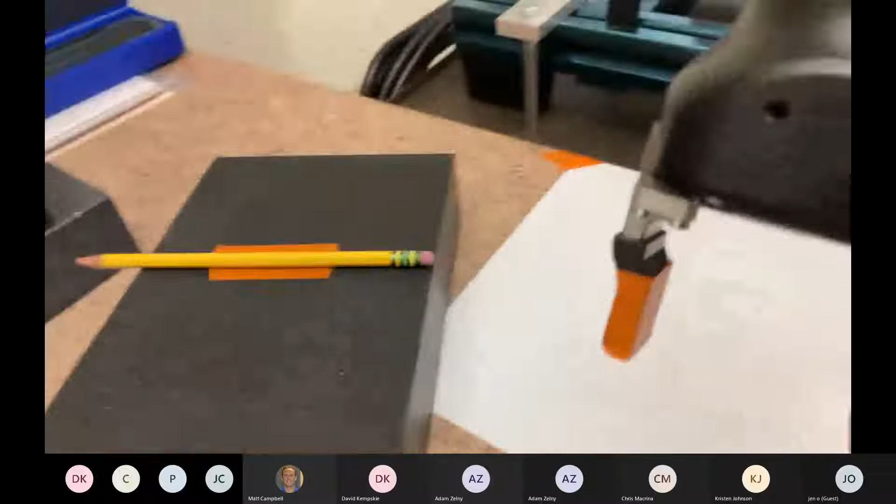A couple other things you might have noticed - I put some masking or painter's tape on the gripper. With this material here of the USB, it was sticking a little bit to the gripper fingers, so that was a quick fix there.

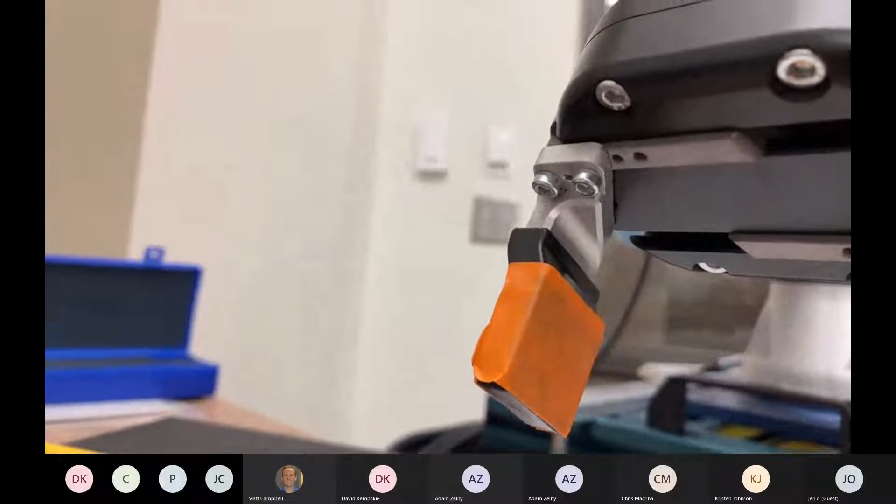When Dave was giving his presentation, a great point came up when we were looking at the omelet making - these two little gripper fingers were just two rods, maybe a half an inch or an inch long. There's nothing stopping you from augmenting these fingers - these little rubber pads will come off, or you could swap them out. You could machine, with your mill, a brand new set of gripper fingers if you wanted to. The kit itself also comes with some different replacements, I believe different sizes too. So pretty cool.

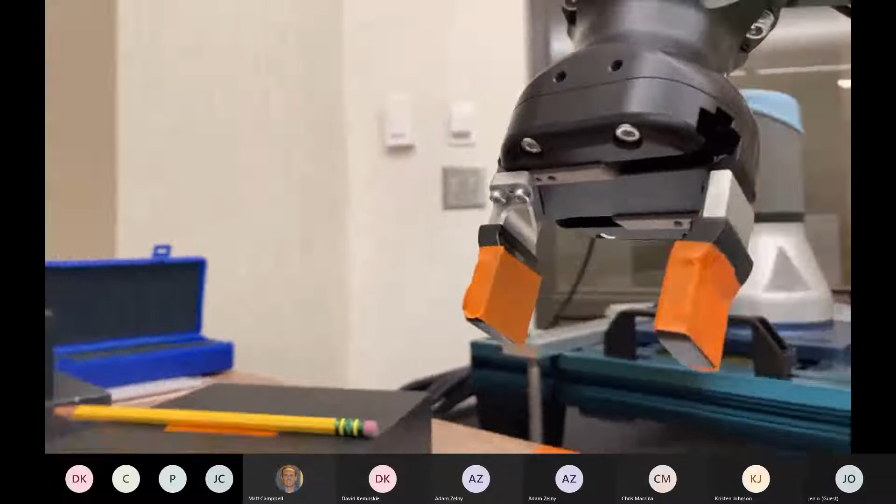I think that pretty much sums it up for the presentation.

Adam, I'll tell you, the camera just adds an incredible amount of diversity for applications. You just touched upon some of the basic things for finding an object and a little bit of inspection, but man, you can do so much more with it.

I'm still learning, and I'm very excited to look more into using QR codes. One thing the Wrist Camera comes with is a small QR code sample designed to be incorporated into your palletizing panel. Let's say you need to move it or augment it - as long as that QR code is embedded in one location, if you moved it up a few inches or it was angled, you can say, if you see this QR code, adjust your work plane to accommodate for that, which is really neat.

I think another thing to point out is going back to 3D printing. I think both of these technologies work out really well together - the fingers, the end of arm tooling right at the gripper, where you had the orange tape. In a lot of applications, you remove those little plastic fingers, and underneath them there are little screw holes to attach your own custom fingers, because a lot of times you need that to match what it is you're picking up. So those fingers by themselves are not enough, and that's where 3D printing lends itself so well.